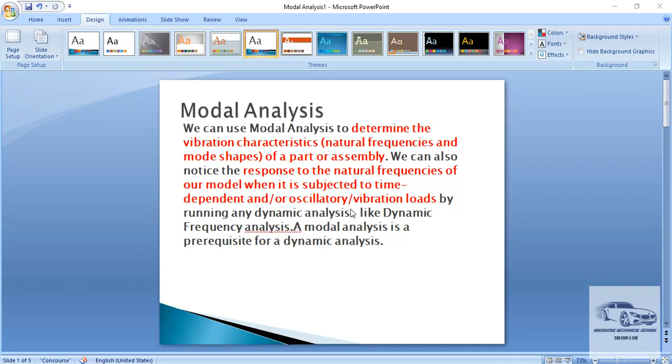Now we know that every part has a natural frequency to vibrate, and under certain conditions these frequencies become large enough which may damage the part. These frequencies are called resonance frequencies. The purpose of conducting a modal and harmonic response analysis is to work out the actual resonance frequencies occurring on a part due to the action of a certain load and also causing vibrations.

Now, for a free vibration analysis, the natural frequencies ωi and mode shapes φi are calculated from this equation: (K − ωi²M)φi = 0, where K and M are constant. This is the basic principal equation governing a modal analysis. In this equation, linear elastic material behavior is assumed, damping is not included, and take note that F, or force, is not present. So in modal analysis, no force is being applied.

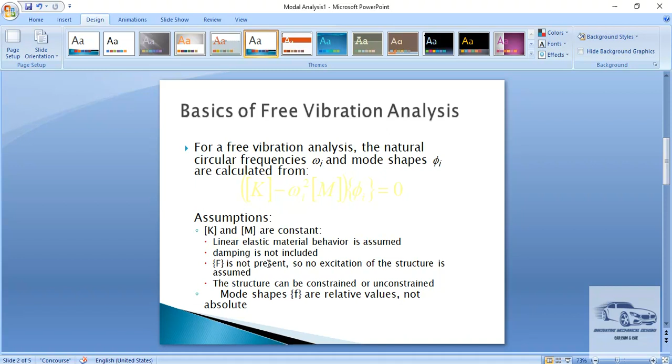So now the question will be: if we are not applying a force, will we be able to get a result from the software? The answer is yes, we will get a result, but those results are relative results and not absolute results, and they are scaled by the software for mathematical reasons. But by observing the pattern of the results, we as designers are able to predict the behavior of the part under certain frequency of vibration.

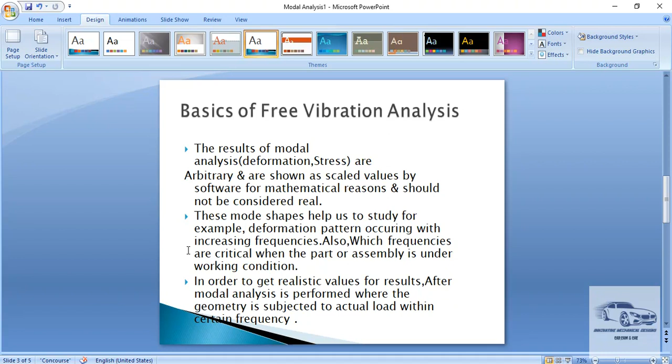So please keep in mind that the results of modal analysis can never be used for a realistic purpose. If you want to work out the results corresponding to the vibration frequencies to a realistic value, you have to go for a harmonic response analysis. So we can also say that a harmonic response analysis is the next secondary phase of a modal analysis, and the inputs from the modal analysis are the primary inputs for conducting a harmonic response analysis.

Now, in a harmonic analysis, basically we are studying the frequency response graphs, that is the plot between the frequency at a certain cycle and a certain result. Wherever we are getting the peaks, that shows the value of the resonant frequency. This we will see when we perform the analysis of the crankshaft. So now let us start with our analysis.

So this is ANSYS Workbench. The first step will be to create a modal analysis. We will go to Analysis Systems and then double click on Modal to create a modal analysis. Now here we have to first specify a proper material. For that we will go to Engineering Data.

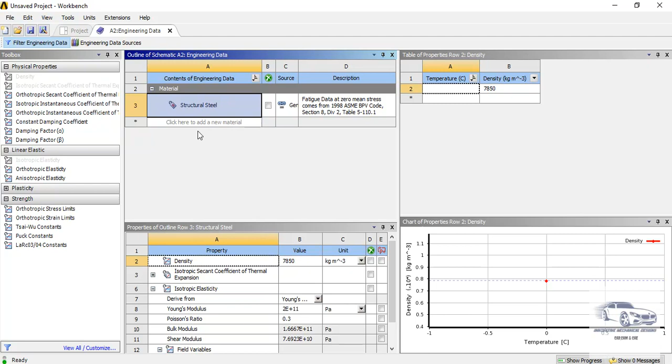Now here the default material is structural steel, but in my case study the material is given as forged steel. So here we will create a new material. Instead of that, we can also create the material by selecting from a standard list of materials already available in ANSYS.

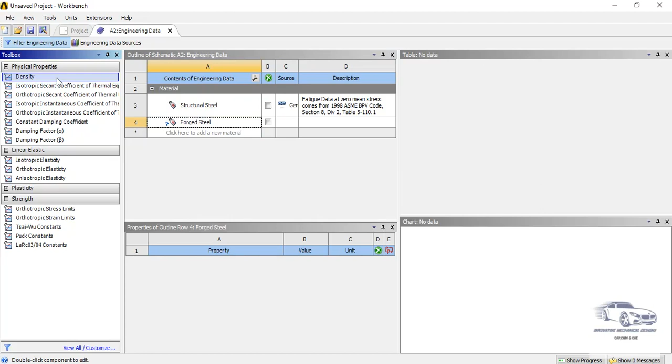Now here there is a question mark, which shows that the software is asking me to specify the inputs. The first input is density. So the density given to me is 7.833 into e raised to the power minus 06 kg per mm cube. So here we will write the value. Here E stands for 10 to the power, so e raised to the power minus 06.

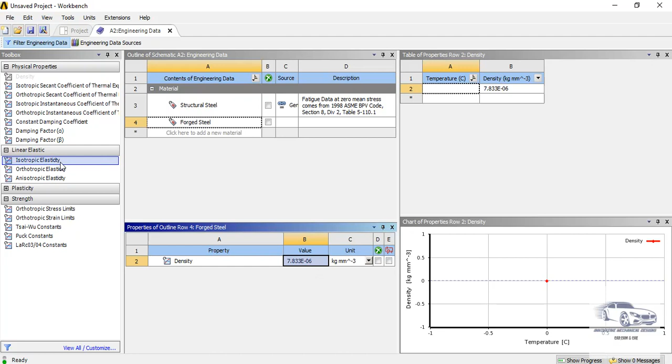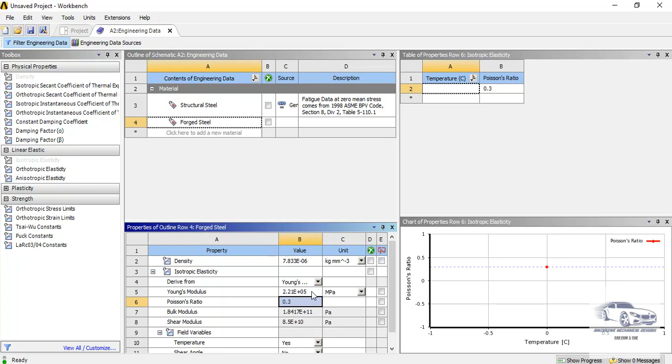Then next will be Young's modulus and Poisson's ratio. So here Poisson's ratio is given to me as 0.3 and Young's modulus is mentioned as 2.21 into e raised to the power 5 MPa. So here we will input the values as given in the data, e raised to the power 5 MPa. Now we have finished the creation of the materials. Now we will close engineering data.

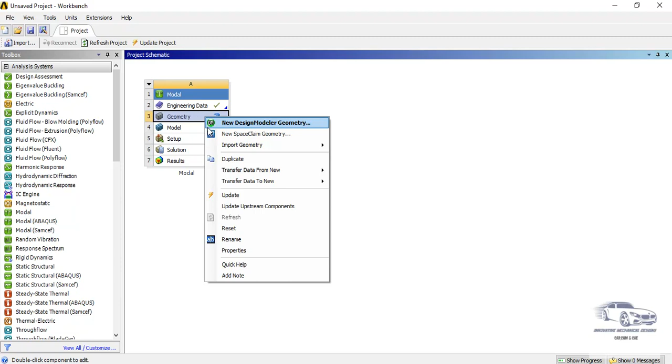The next step is either you can create a geometry in the design modeler workbench or you can import a geometry already created in a CAD software like CATIA, SolidWorks or any software. So here we will import the geometry: right click, import geometry and then browse. So here I have already created the geometry. Now I will be selecting the geometry from the desired location. So this is the part.

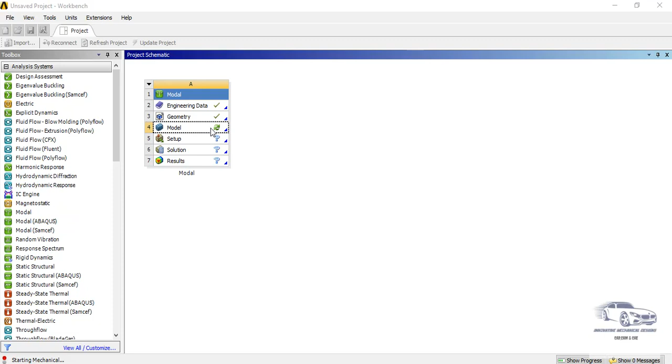Now we will go to model or mechanical workbench to mesh the part, then apply the raw material and then apply the necessary inputs to solve the analysis. So now the part will be transferred to the mechanical workbench by the software. So this is being displayed here. Now here first we will set the units.

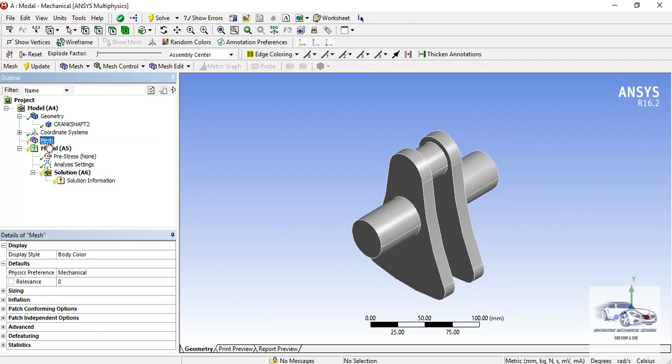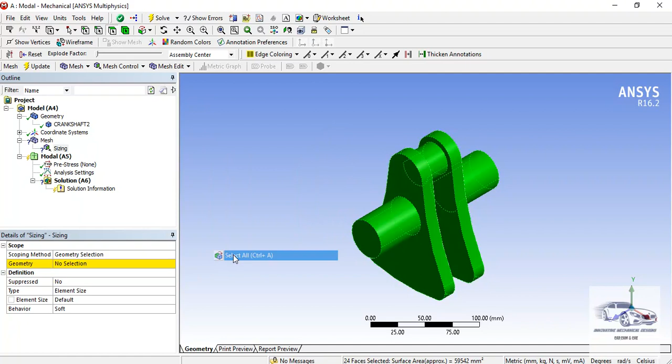Next step will be to assign the material. So here I will select the part and here in assignment we have to change from structural steel to forged steel. Now here for meshing I will be selecting an element size of 5 mm for all the faces. So here I will select right click, insert, then sizing. Now here I have to specify the sizing on faces. So I will select faces, then right click and select all. This is a shortcut method if you want to select all the faces at once.

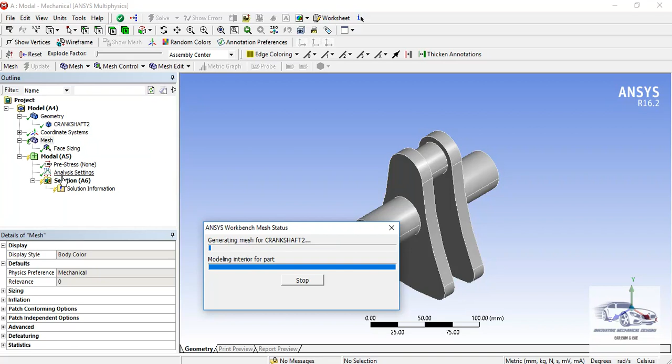So here I will write the value as 5 mm. I am not going to change the rest of the settings for the mesh. Then right click and generate mesh. So now the mesh is getting generated. So yes, we have completed the mesh. Now suppose if you want to check how many total number of nodes and elements are there in the part, you can go to statistics and here we can see the total number of nodes and elements.

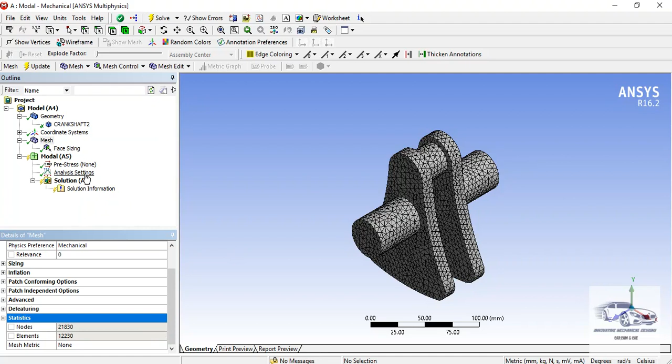Now the next will be specifying how many mode shapes I want to see. So here I will be taking, let us say, 10. The more mode shapes we add, the more accurately we can predict the behavior of the part under the increasing frequency of the vibrations.

Now here we cannot apply a load, but we can apply a boundary condition. So here I will go to insert and then fixed support. So in fixed support I will be clamping the outer faces of the crankshaft, assuming that they are mounted in a fixed manner in a casing in which the crankshaft is rotating.

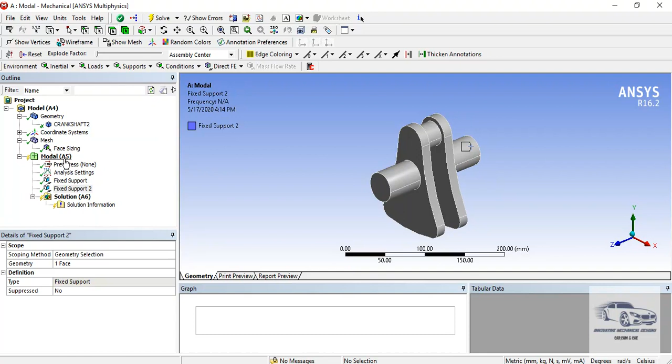After that, instead of creating the fixed support, we can also apply the fixed conditions by using cylindrical support. So here I can go to cylindrical support. In cylindrical support, I will be selecting these faces. So by control selection, I will be selecting the faces, then apply, and here the degrees of freedom which I can restrict or free are radial, axial and tangential.

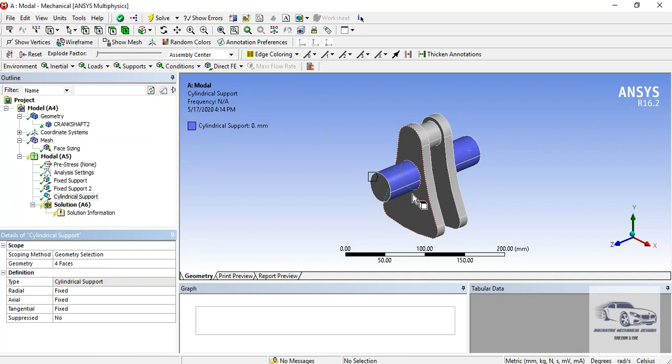So radial will be like this, in this direction. Axial will be along the axis of the crankshaft, and tangential will be if suppose it is in contact with a neighboring